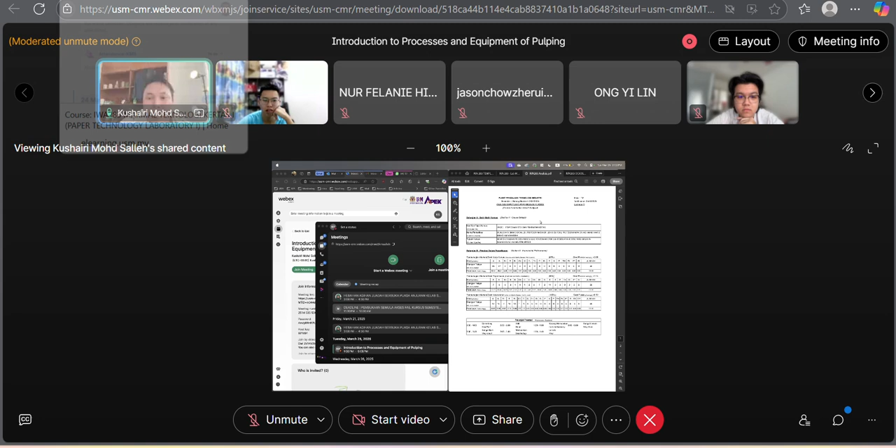So now you can see my screen, right? Okay, this is the analysis for the results. So this is the analysis for IWK203. So those who...

Those who scored this subject, basically solid A, 35, and then 21 of you get A minus. Only 2 of you get B plus. So due to the final exam results, as you can see, 11 of you failed the final exam.

Okay, 11 of you failed the final exam. 2 of you get D minus. 7 of you get D. And then the rest, I think, is quite okay lah.

And then I want to congratulate those who got solid A. Actually, I know who the student is. Congratulations. You made it easy to mark your final exam papers. It's very easy for me to give marks to you guys.

Also, same goes to Dr. Lee and also Dr. Hafiz. But overall, your results, your batch result is better than your seniors, because last year only 1 of them got an A, and then 3 of them got an A minus, and then the rest, I think the result is quite flop, not good at all.

But your batch results is much better, far superior than your seniors. So congratulations, meaning to say the different approach that we used throughout last semester proved that it works for you guys, and hopefully this year for IWA283 you guys will also get a very good result.

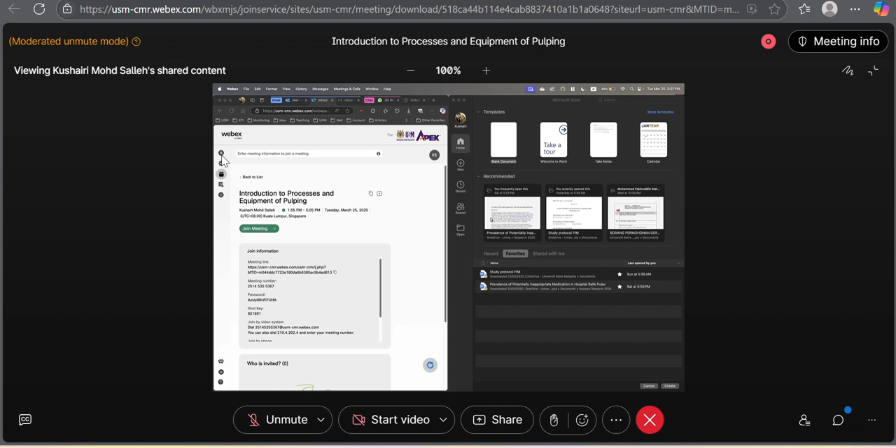Okay, this is the instructional plan. So you shall have the lab every Tuesday, from 2 p.m. until 4:50 p.m., depending on the lab assistant. Sometimes the lab assistant is okay with you guys staying longer in the lab, but it depends on the lab assistant. So you need to cooperate with Encik Mazlan and also Puan Hasni.

Okay, so basically in this course, we have 3 CLOs. I think every semester I always emphasize the CLOs, because at the end of the course, you need to know what you actually learned in this course. Because in this course, we have 3 main objectives, the course learning outcomes.

So the first one is to follow the practical manual instruction to run experiments related to pulp and paper. The second one is to perform the practical in the group, so later on you need to fill up the form for the quality work. So you will assess your friends, and then you will assess the leader of the group. And then the last one for the CLOs, actually we have 4, is to perform the practical in group.

The second one is analyze and discuss the data critically. And then the last one is report the practical work with support of relevant information from various sources. Meaning to say, when you write a discussion for your lab report, you need to make sure no less than 10 publications are used as reference. No less, more is better. So for that, you will score higher for this part, for CLO4.

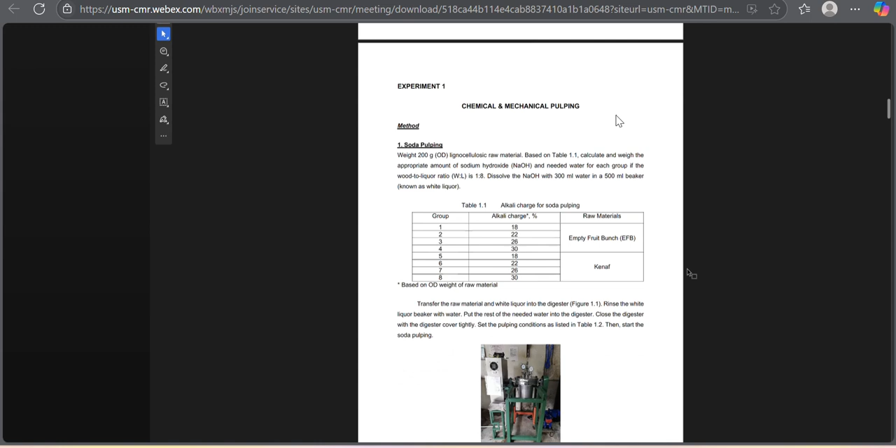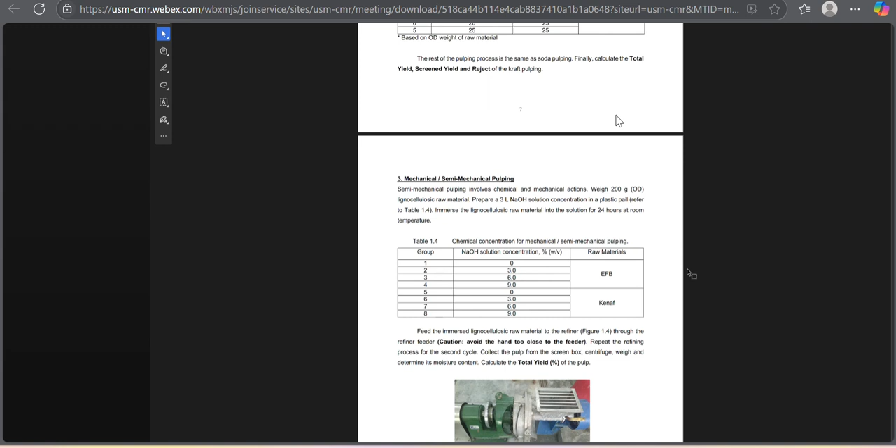You will learn about chemical pulping like soda pulping and kraft pulping, and then about semi-mechanical, or what we call mechanical pulping. Why do we call them mechanical or semi-mechanical even though chemicals are used? You need to understand the difference between chemical and mechanical pulping lies in the temperature used.

Usually for chemical pulping, we use temperature higher than 70 degrees Celsius. If the temperature used is higher than 70 degrees Celsius, we identify the experiment as chemical pulping. But if, even with the presence of chemicals, the temperature used is less than 70 degrees Celsius, we identify it as mechanical or semi-mechanical pulping.

So the first chemical pulping is soda pulping. Since we have 8 different groups, group 1 through group 4 will use empty fruit bunch, and groups 5 through 8 will use kenaf. I want you guys to compare your results - for empty fruit bunch, compare results from group 1 to group 4, and compare results from group 5 to group 8 for kenaf.

Then I want you guys to combine all the results and compare overall results based on empty fruit bunch and kenaf, even though they might use similar alkali charge. What makes the screen yield, reject yield, and accepted yield different, even though you use similar alkali charge?

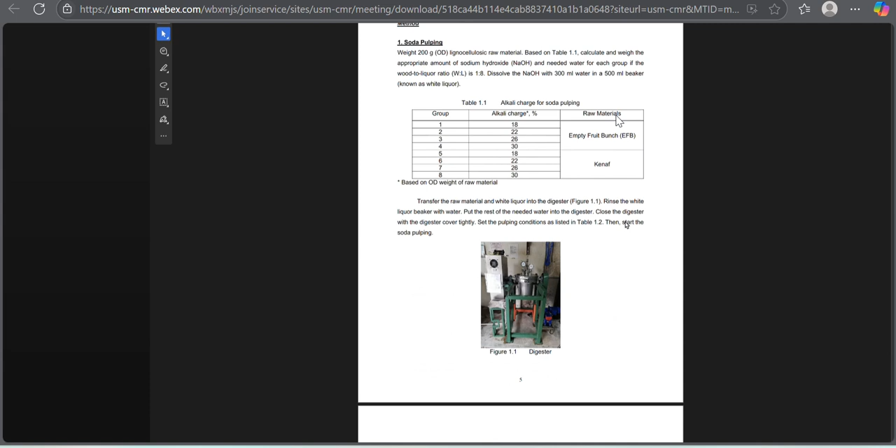Even though the experiment starts on Tuesday, I'll allow you guys to start the experiment as soon as Monday, but you need to refer to me first. First come, first serve - if you're late finishing, you won't finish the experiment, so you will cause the overall result to be incomplete because of your group. Each pulping time is 90 minutes.

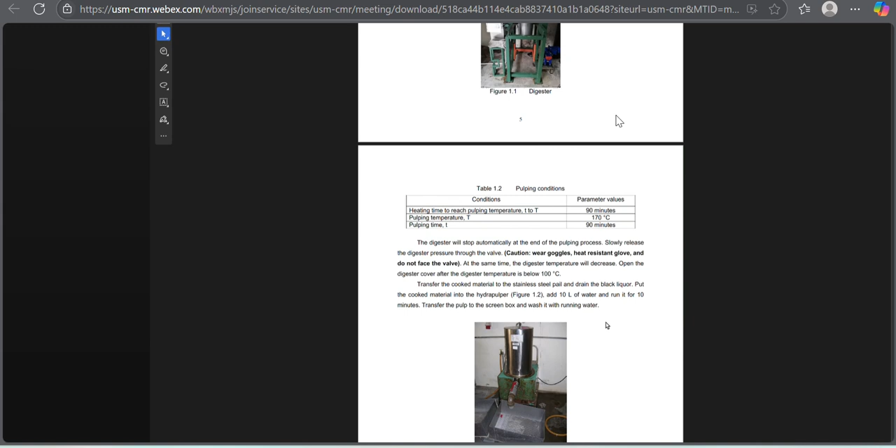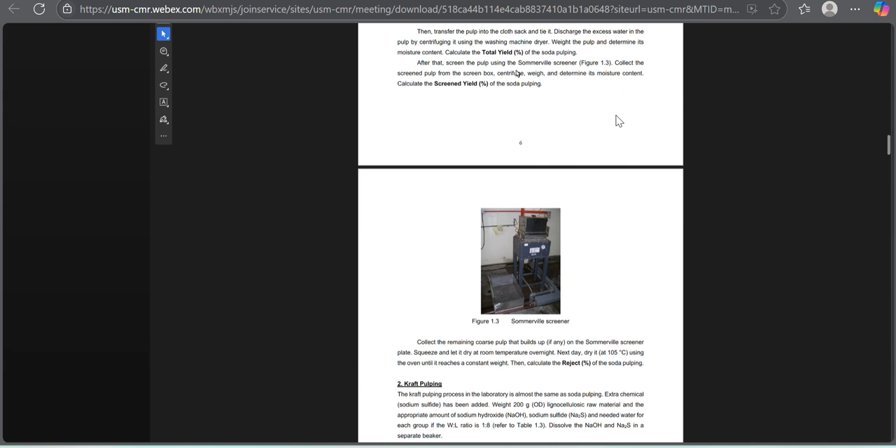Please, group leaders, pay attention. You need to book the machine with Encik Mazlan. This is for the soda pulping. For each pulping, you need to calculate the total yield, the screen yield, and lastly the reject yield. As you can see here, I bold the text - total yield, screen yield, and reject yield.

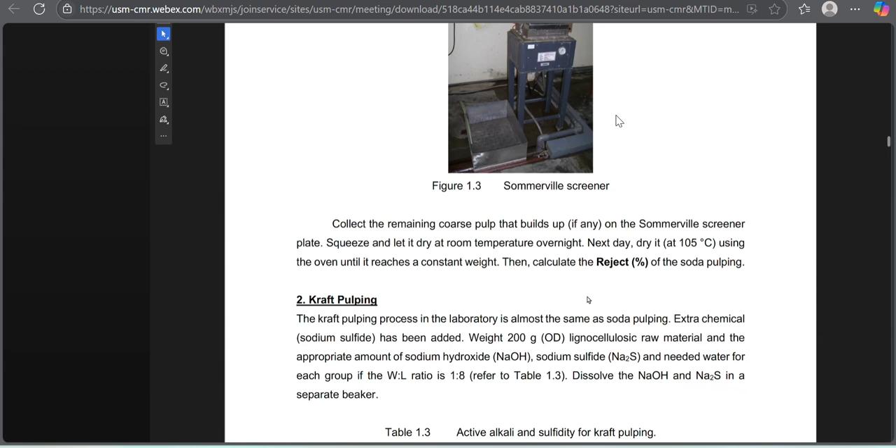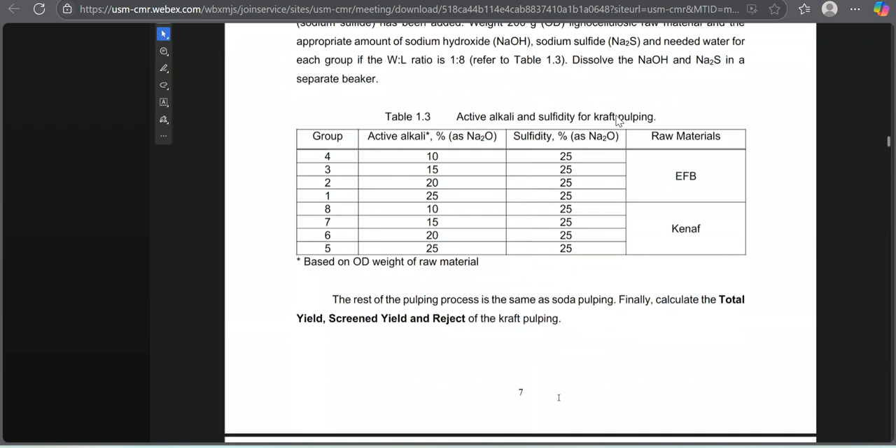Similarly for the kraft pulping, we use 2 different chemicals - the active alkali, and then with different sulfidity. We also have 2 different sample raw materials, the EFB and Kenaf.

Later on I will share the lab report from your seniors so you can refer to the calculation, just to help you guys monitor your calculation. I don't want any of you to have miscalculation.

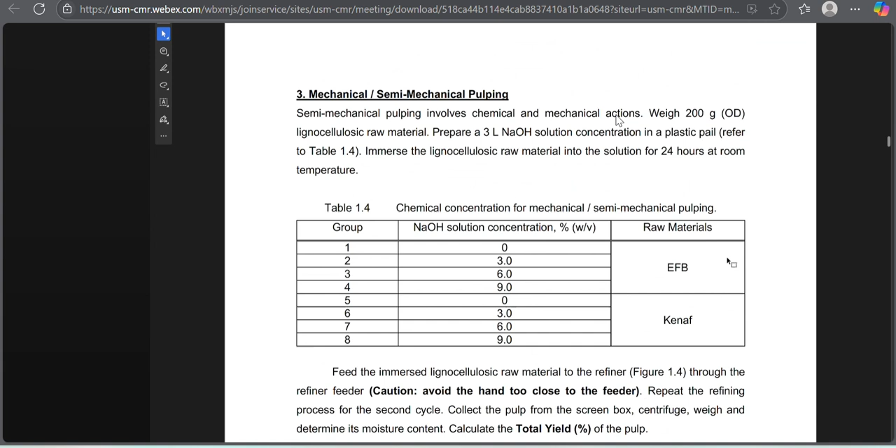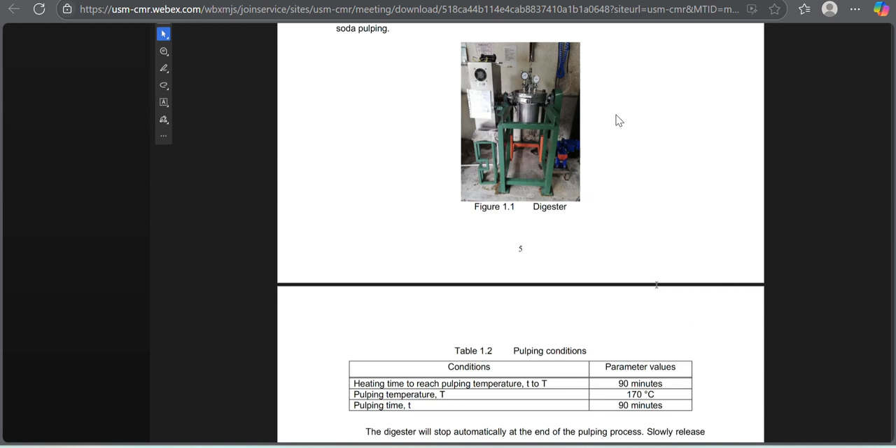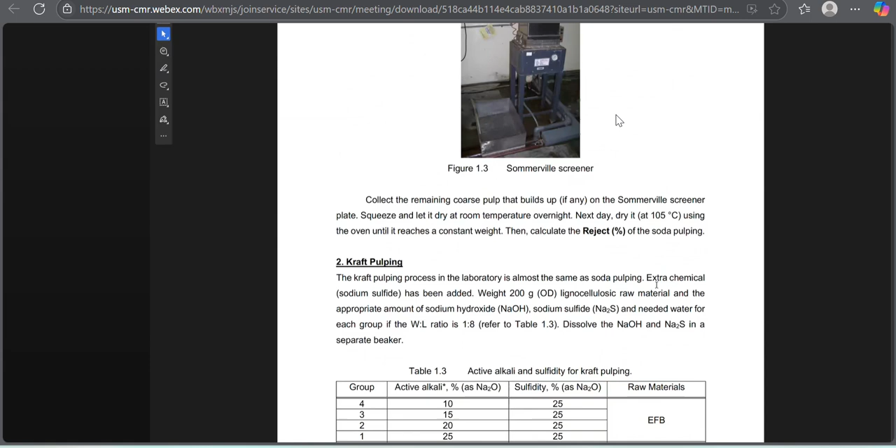This is for the mechanical and semi-mechanical pulping. For these, you can start the experiment either way. Let's say the digester is already fully booked - group 1, group 3, and group 6 already booked the digester. So you can proceed with the mechanical pulping, you don't need to wait for the digester. You can use this machine - actually kraft pulping also will use the digester.

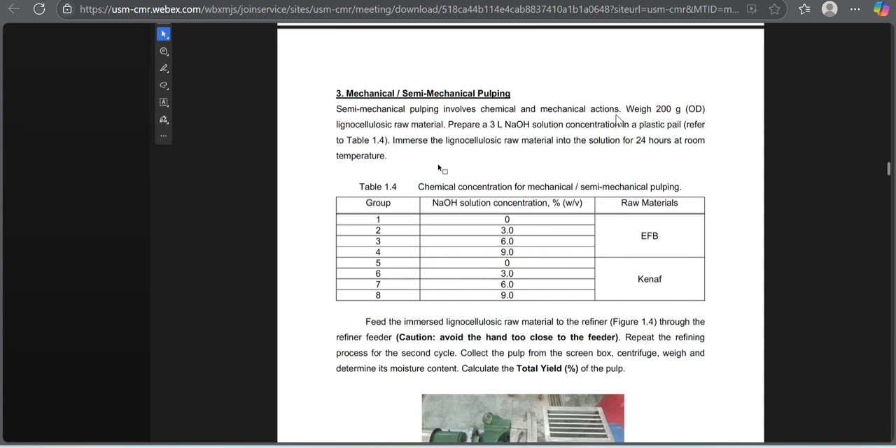For the mechanical pulping, this one is different, so you just need to read the lab manual. Actually the experiment is about the same for all 3, but only the chemicals and the conditions differ.

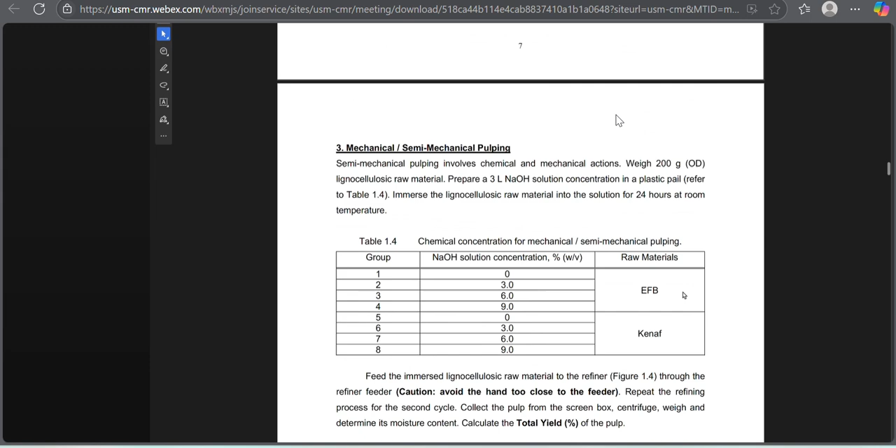That's all for experiment 1 brief, that I want to brief you guys with experiment 1. Actually, experiment 1 is very important.

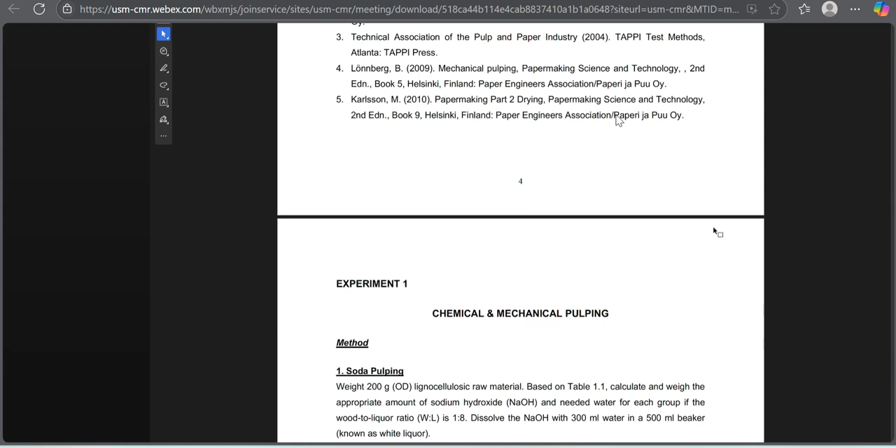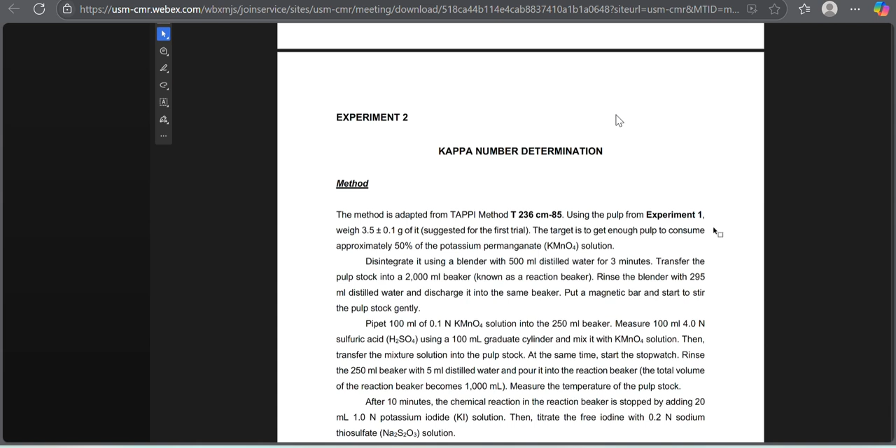If you cannot conduct experiment 1 properly, you cannot have a good result for experiment 2, because you will carry your sample from experiment 1 to experiment 2. We want to calculate the kappa number based on the different alkali charge or sulfidity or the parameter that you use in experiment 1. So make sure the calculation in experiment 1 is precise. Only then you can have a very good result in experiment 2.

So that's all I want to brief with you guys about the experiment. I already briefed you with the instructional plan and also experiment 1. Later on I will upload the lab manual, and I also will upload some of the calculations from the previous lab report of your senior, so you can refer to that to see how they calculate everything from A to Z for experiment 1.

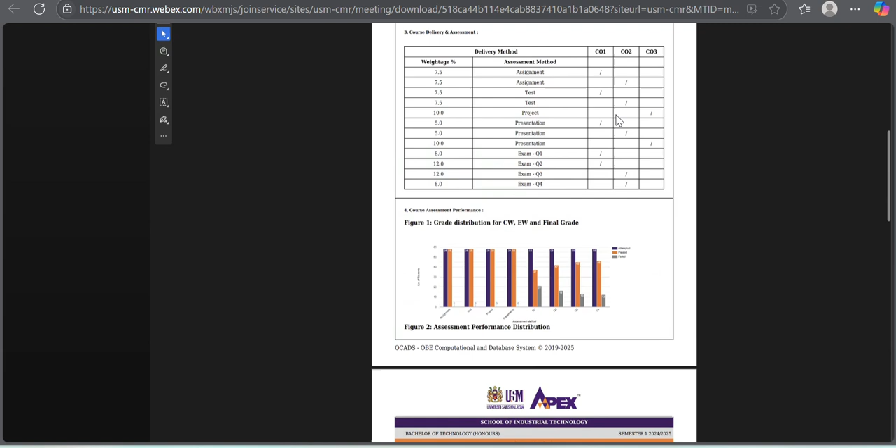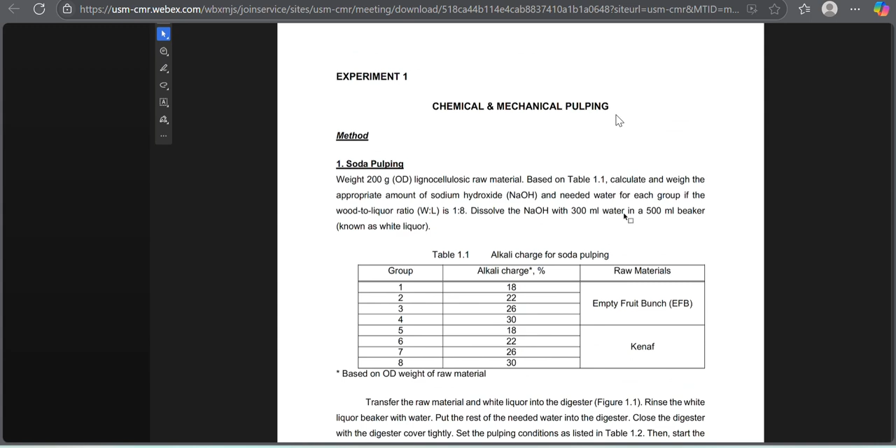Like I said before, the group leader must make sure that on Tuesday, week 3, before you enter the lab, you bring together the short notes in flow chart form, anything related to the experiment 1 methodology. I don't want any of you referring to the lab manual during the lab, only your notes. It is not efficient for you to run the lab and read the lab manual every single step. The lab manual is very lengthy.

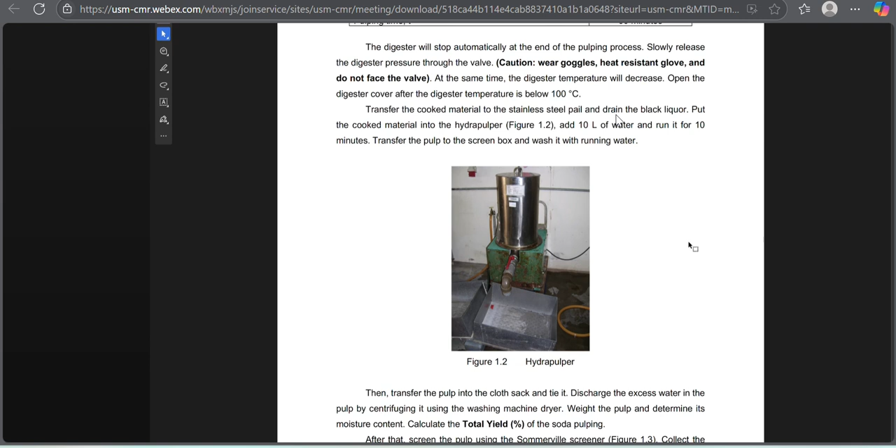So simplify them into a flow chart, it will be easier for you to conduct the experiment. As group leader, ask your lab mates whether the notes you've prepared for the experiment are good or sufficient enough. If your group members think your short notes are good, you can use them. If not, the group members can help the group leader prepare the short notes. I don't want to suddenly hear that the group leader appointed someone in the group to write the short notes for each experiment. I think that's all.

Remember, for IWA283, even though this is only a 2 credit hour course, the knowledge you learn from this course is very important, because previously you learned the theoretical part in IWK 103 and IWK 203. So IWA283 is where we want to see whether you really understand what you have learned from the previous courses or not.

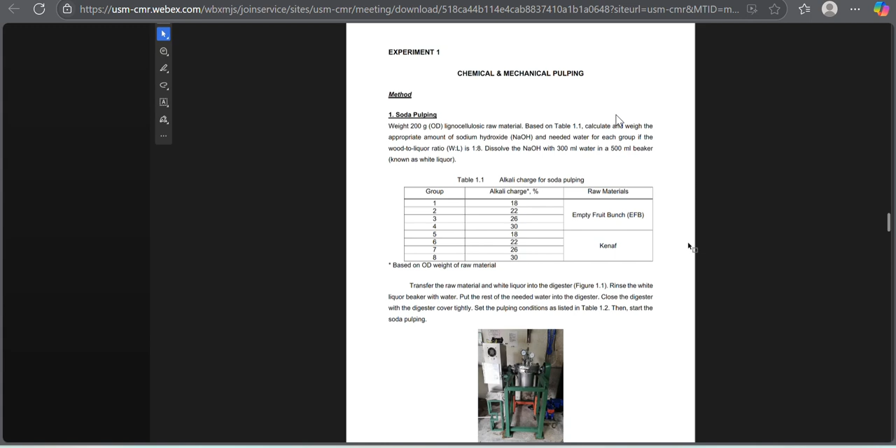This is compulsory, you need to pass the subject. If you fail this subject, you need to repeat this course, or else you cannot take IWA382 with Dr. Lee. This is a compulsory subject, so try to learn as much as possible. This is when you can ask your lecturers, myself and also Dr. Hafiz, anything related to the pulp and paper technology theory, and how you can apply it in your discussion part in your lab report.

I think that's all I want to brief with you guys. Later on I will upload the lab manual and also the list of the group members. So the group leader for each experiment, especially experiment 1, you can text me anything related to experiment 1 if you are not sure about it.